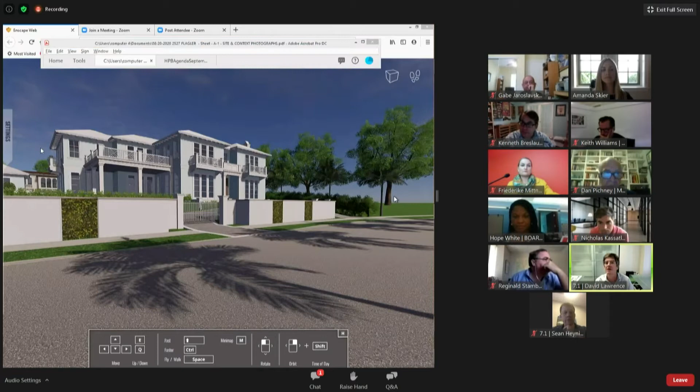Is that coming up, or hold on? Yes, okay. So there's this, let's see, whoop, that's not it. I've never had a problem like this before. So are you seeing, why is... this is the rendering that's up, but previously you had the image from your PowerPoint or PDF that had all the images. Give me just a second. There we go, all right, so that's showing now.

Hopefully. Okay, great. Sorry about the technical difficulty there. David Lawrence, for the record, David Lawrence with David Lawrence Architecture, here to talk to you about our resubmittal for 2527 Flagler. This would be lot 2.

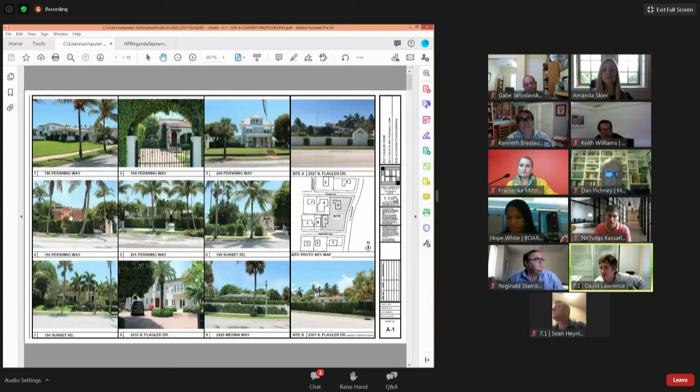So we'll move on. This is the streetscape from before, along the south side of Pershing, and along the north side of Pershing. This was what we discussed last month. You can see my cursor, I hope, right? Hopefully, can you see the cursor? Okay, great, just want to make sure.

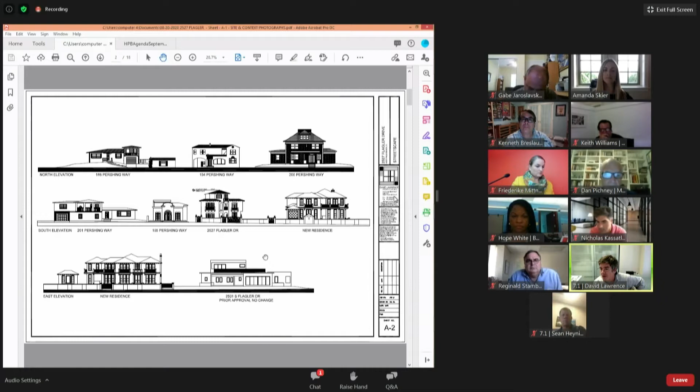And this is the proposed revised plan for the house in front of the general's house, from the Pershing view. This is the streetscape showing it from the Flagler view, and this is the streetscape showing the 2501 approved version of the elevation. So this is the existing property, and this is the easement that we're in the process of abandoning right now.

And this is the site plan showing you all 3 lots. This is the original lot. We are taking a portion of this 2501 lot to create this lot here, lot 2, which we'll be discussing today, and then I'll go on to the site plan.

I think to go over what your comments were from the last submittal, about 2 months ago, there was the concern about us using this common driveway, which I think we addressed in our submittal last month, that each house would have its own driveway. So the 2527 Flagler house has a U-shaped driveway that will operate off of Flagler Drive. That was one of the comments.

The secondary comment was that you wanted the house to more appropriately address Flagler instead of the motor court concept that we had. And you wanted the pool building, cabana building, to not be as prominent. Let's see, what else was there? Yeah, that was it, I think.

So here we have the site plan with the U-shaped driveway with the gates. We had to pull the gates back a little bit for queuing and access. So now the proper front of the house is here, the front door is on Flagler now. And we have moved 1 bedroom upstairs, so we have more of a compact footprint than before, so the coverage has gone down.

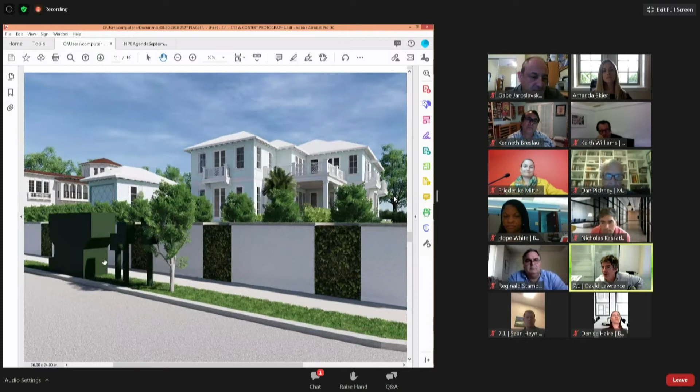So here we go. This is the perspective from Pershing, and you can see our infamous lift station generator there that's caused all our grief. And you can see this is what I meant by where we reworked the mass so that the house has something that more properly addresses Pershing.

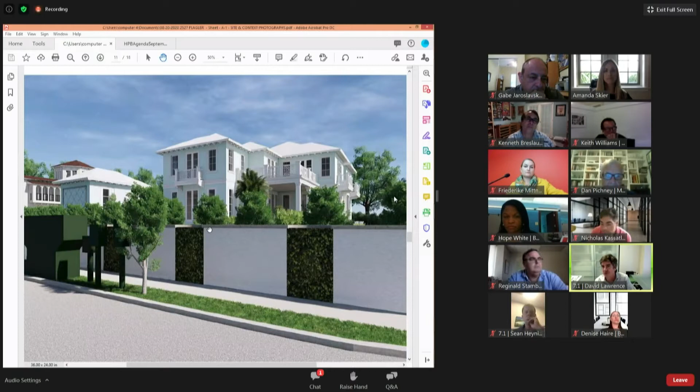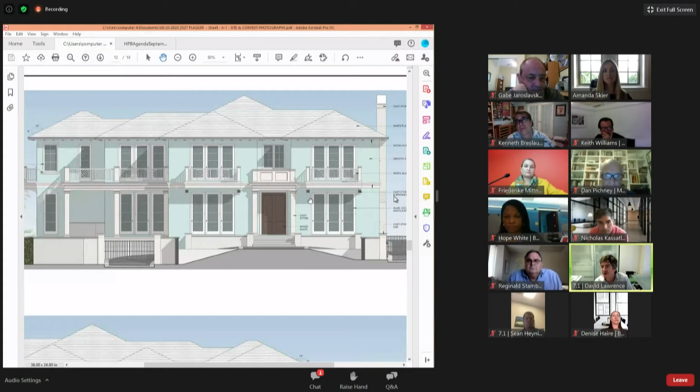And I forgot about one of the other things that you mentioned, about the west side of the house, and we'll discuss those improvements when we get to the elevations. So this is the front elevation of the house, and there was a condition of approval, and I guess I'll address that last if that's okay. So we have the balconies here, very much fronting Pershing, fronting Flagler.

So this is the back of the house. Let's see if I can zoom this back a little bit. So this is the back of the house, you can see what we did. One of the comments was that we had a lot of blank walls back here, so we reworked the plan considerably. And you can see there's a little bit of symmetry in this part of the massing.

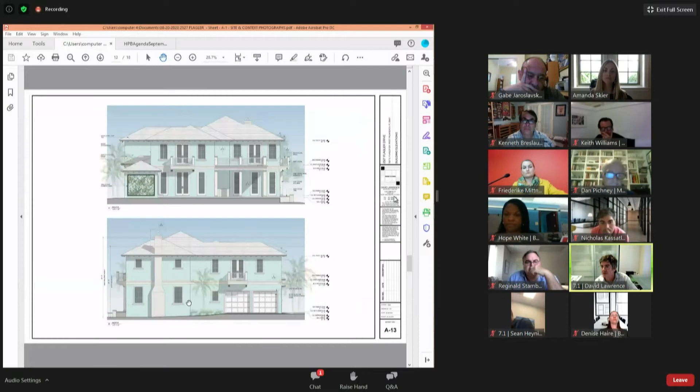And we've added windows so that when you approach this house from the west going toward Flagler, that west side of the house is more pleasing to look at. And I think that was also, if I recall, one of the other criticisms. So this is the elevation from Pershing.

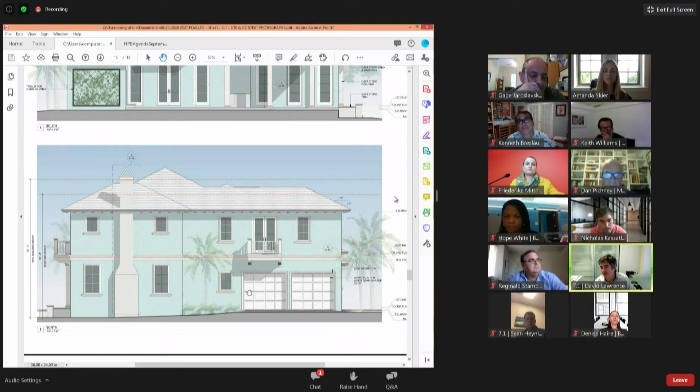This is a little trellis that we put on that one side of the cabana. And then this is the elevation, the hardly seen elevation from the north, which will be occluded by the future house on 2501. So you can see the garages are way back, totally tucked around the mass of the front living room.

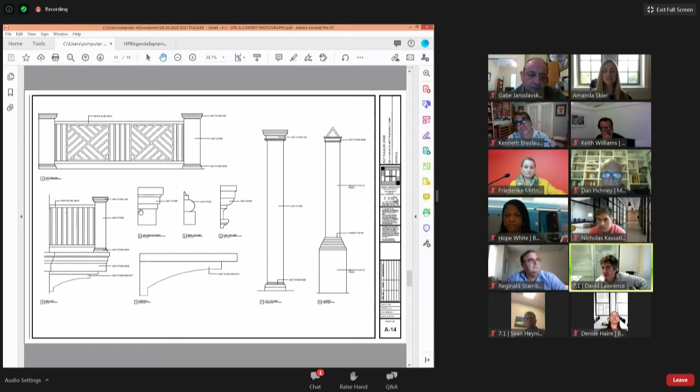Thank you. Do we have any questions of the applicant? I have a question. David, can you just explain, I guess I can maybe see from this rendering how the elevations are working.

It looked like in plan that maybe you had basically a wall around the perimeter of the pool on the south side that returned on the east side, kind of retaining a higher elevation. This will be more or less where this grade is. It's showing a slope down a little bit, but we probably will pull this up somewhat. So it won't come down so hard as the rendering shows, it'll be up a little bit more, so that'll be a little more level. But I got it, we'll have to reconcile the grade situation here because it's up quite a bit.

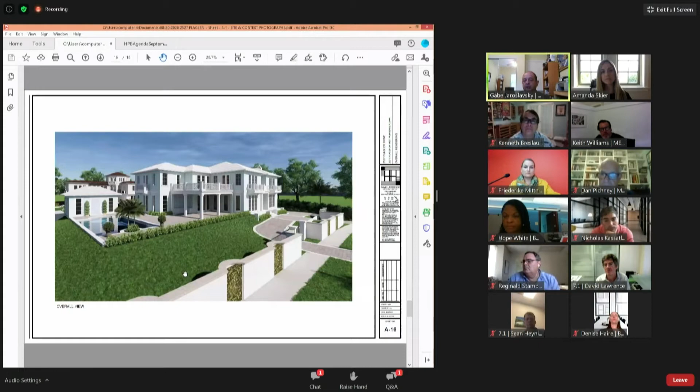Any further questions of the applicant? Yes, I have a question. So here in sheet A5, the zoning summary, you are saying, unless I'm reading it wrong, that the front setback is 26'8", and the required is 30 feet. Is that correct?

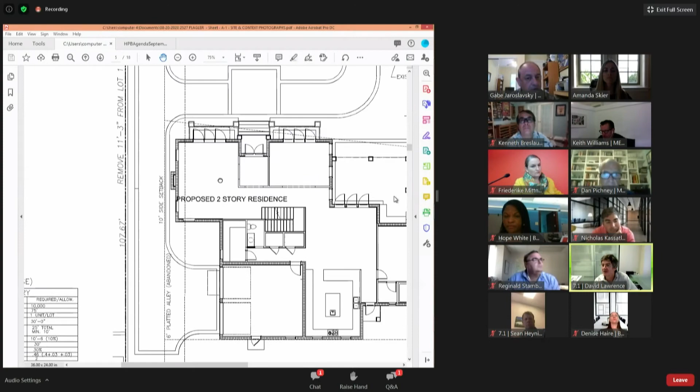It's we're at the setback, it's the 30 feet, that's the mistake. I'm sorry, but it will be behind the setbacks. It is the 30 feet behind the setback. That's a graphical mistake in the drawing.

Well, so you need to correct that table, right? Yeah, we'll have to fix that. There was actually, there should have been a separate zoning sheet that was included and submitted by the applicant. It's the last page of the packet in this case.

But I'm sorry, that actually does not include setbacks, that's just the percentages, I apologize, it doesn't have the setbacks. Yes, it's sheet A5 that has the zoning summary table. The dimensions on the plans indicate it correctly. I see, it's the chart, yeah. Chart's messed up.

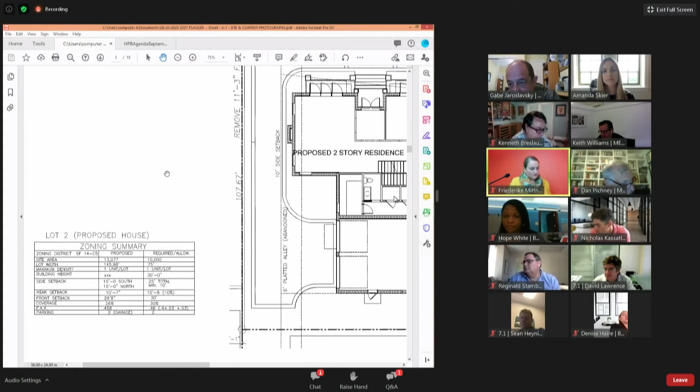Okay. Any further questions of the applicant?

Thank you. Well, I greatly appreciate you taking into consideration all of our comments. We really appreciate it. I think it's a better building for it, so I agree with your comments, and I think it looks better. Thank you for working with us. You're most welcome.

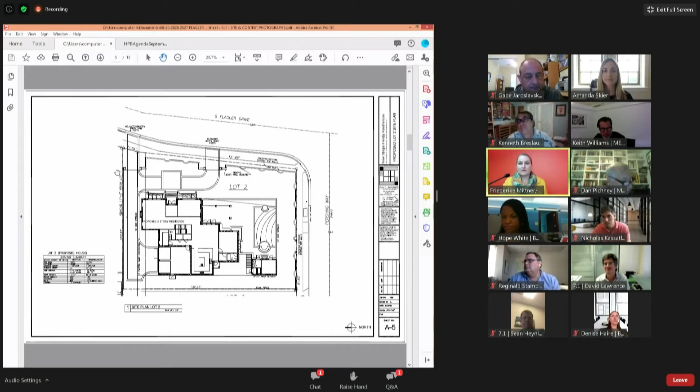Ms. Mittner? Thank you. I will go ahead and pull up my PowerPoint, which has a lot of the same or similar images as the applicant. Friederike Mittner, presenting case 20-38.

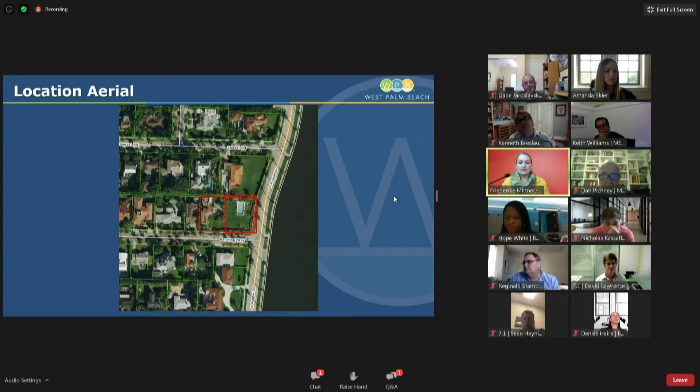This is for the new construction of a single-family home on the eastern portion of the lot, seen here at the corner of South Flagler Drive and Pershing Way. As we've discussed previously, the lot is going to be submitted for a replatting for a lot subdivision, as well as an alley abandonment on this portion. The board last month already approved the rehabilitation of the existing contributing structure. So this evening's focus is just on the eastern portion of the lot that, pending approval of that lot split, would be then eligible for new construction.

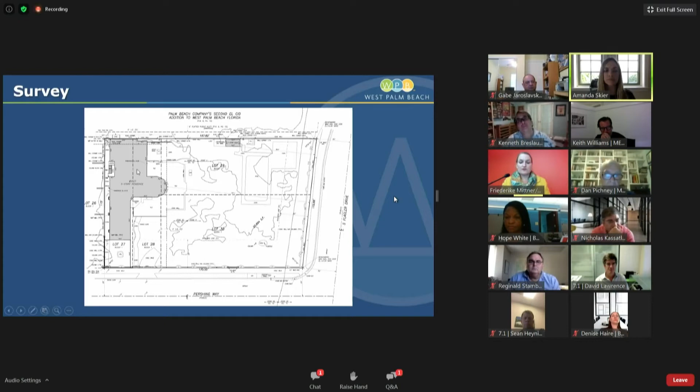This is the current survey of how the property is configured with the contributing residence to the west. These are just some images looking at the subject property. This is looking north along Flagler Drive. Again, this is the portion of the lot that is proposed for the new construction, a little closer in, and as has been discussed previously, the lift station. We did get some feedback that the city is continuing to work on the relocation of it, but there is no commitment for a time frame on that.

The wall element, which has been presented in the plans to be retained, some modifications for openings along Flagler Drive to accommodate the new drive. And so again, the request is for the construction of a new 2-story single-family residence and a detached 1-story cabana of approximately 6,100 square feet on the newly created lot fronting Flagler Drive.

Proposed, as you can see, smooth stucco finish, a flat white tile with multiple hip roofs. I think that's one of the bigger changes from the previous proposal is the roof lines. It's a Bermuda-inspired home. Windows are a mix of multi-pane with horizontal muntins, both fixed and casement style windows with white frames. And it is now an east entrance, and they are proposing a wood simulated double door and Chippendale railings throughout the different balconies.

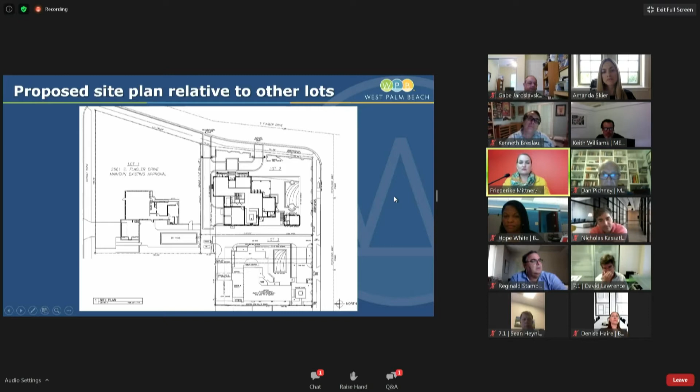So again, as you've already seen the existing site plan, there's currently a swimming pool in the area. And then this is how the 3 lots would work. Again, what you heard and approved last month was lot 1. Tonight's presentation focuses solely on lot 2. As you've already seen the site plan for just lot 2, the first floor plan, the second floor plan, and the only 1-story element here is that cabana, and the roof plan.

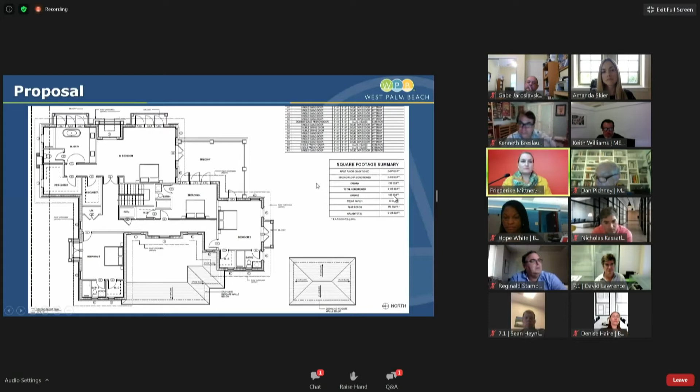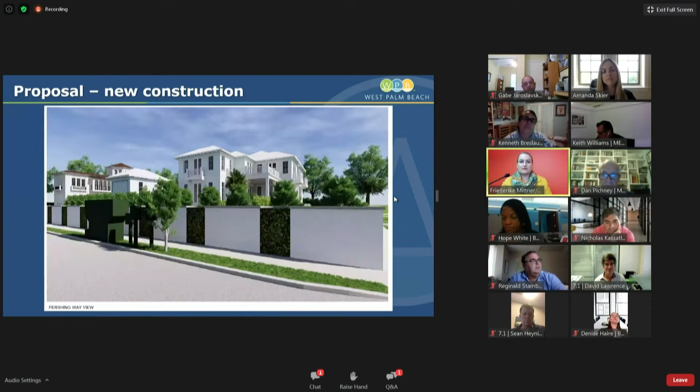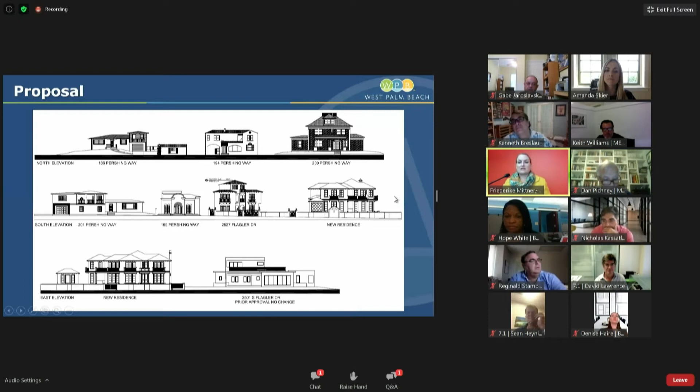The elevations that were presented to you. This is the front door. Staff has a recommended condition that it does become a single door. The other elevations and some of the different renderings showing the different perspectives that were just shown to you as well. This is walking around. And then again, the streetscape relative, the line drawings relative to the other homes. And so you can see it's kind of been compacted more and condensed in its massing.

The review criteria that staff used to analyze the request are the criteria in our historic preservation ordinance, the additional compatibility standards, as well as Secretary of Interior Standards number 9 and 10. Those are the 2 that relate to new construction. We do believe the proposal meets those, and we are recommending approval with conditions that, of course, the alley abandonment and the subdivision process shall be approved and finalized prior to any permitting or work commencing on the new construction of this house. The perimeter wall shall remain and be restored as indicated on the submitted plans.

That does include removal of 2 portions where the driveway would be added, and then the pyramidal portion being added at another location. We are recommending the front door shall be a single door with or without side lights, and that we do need additional information on the windows in terms of the product approval prior to permitting, to make sure that they are compliant with the adopted fenestration policy, including the materials and glazing, muntin profiles, and just getting those details right. Otherwise, again, we are recommending approval with those 4 conditions.

Thank you. Thank you. Questions of staff?

We're okay with all the conditions with the exception of one that we would respectfully disagree on: we would prefer that the front door be double doors as designed. That would be the only thing. Partly it has to do with the way the windows work up above and some of the elements on that balcony, we just felt it looked better with two doors.

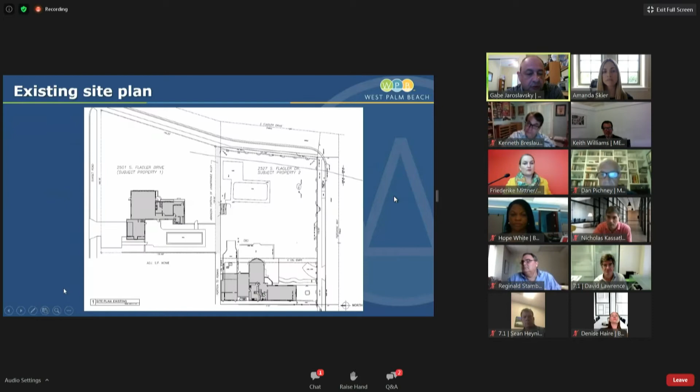And the relocation of the one pyramid, let me show you, so that would be this one. The gates are over here, and then the pyramid shifts, but I'll have the applicant expand on exactly where they're going.

We actually did not have the pyramid relocated. We were removing it in our plans because there didn't seem to be a logical place to put it. So that was in our plans. We really didn't have it relocated, we had it removed, the pyramid piece. And what we were doing for the gate pieces was...

The heights of these pieces exceed what's allowed by code, I think. So the idea was to duplicate the shape of them and put them at a height that's more commensurate with code, because we're pulling them back. So that was the idea for that.

Is that pyramid something you could relocate? You would have to replicate it now. It kind of blocked a lot of sight lines, so we were not real keen on keeping it, to be honest. It didn't.

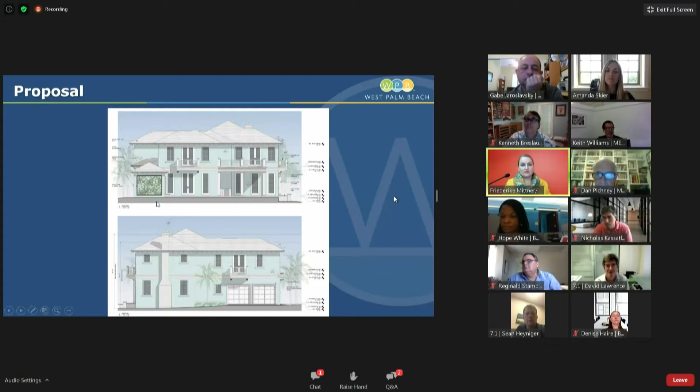I would make a recommendation that if it's relocated right in front of the cabana here, there's no sight line obstructed. That's exactly what I was going to say. We have zero problem putting it on Pershing wherever you would like it, we'll work that out with you. How about right where the generator is? Yeah, right where that, you betcha. So somewhere on Pershing. Yeah, we have zero problem with that.

Also, David, that pyramid really is interior facing. It was a plant holder originally, so we'll dress it back up, make it nice. So you would be okay with us adding that as a condition, that you'll work with staff for the relocation? Yeah, that we'll relocate to Pershing, absolutely.

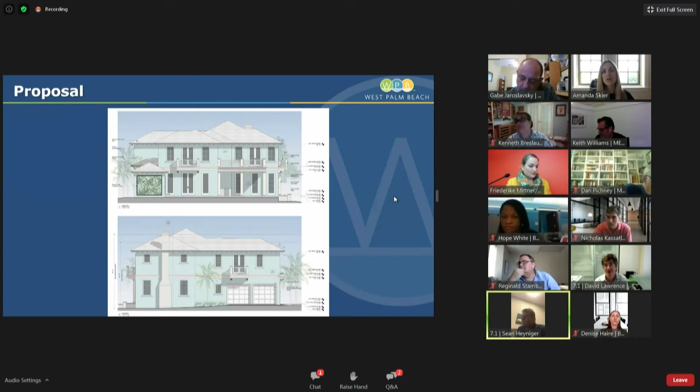And Ms. Mittner, do you have any concerns that the size of the original piers are changing with the two lions? I did notice that in the rendering. Well, it's just a code issue, isn't it? But they're historic existing, properties are exempt. Right, you're right. I think these are really key elements.

Okay, we have no issue — I was trying to anticipate that we were breaking the rules and trying to make it right. But if you're telling us that we can use them as is, then we will either reuse them or duplicate them. Well, they're existing, so yes, we'll work with you. And would you mirror the same height at your new entrance for the other portion of the drive? I guess we would have to probably, that was another part of the reason — they could become obstructions.

I think my concern is that this property is being subdivided, a new home is being built on it, but by preserving the walls, there's evidence of the fact that it used to be one property. So I think that would be my concern in altering them significantly.

Well, I guess what we'll do is if we duplicate the other ones, we'll see how that works out. And if it's an issue where it doesn't work out, we'll come back. So we'll agree to it, and if there's a big problem, we'll try to work it out with staff. And if not, we'll come back. So we'll accept that we'll duplicate those other ones on the other side to make a match the best we can.

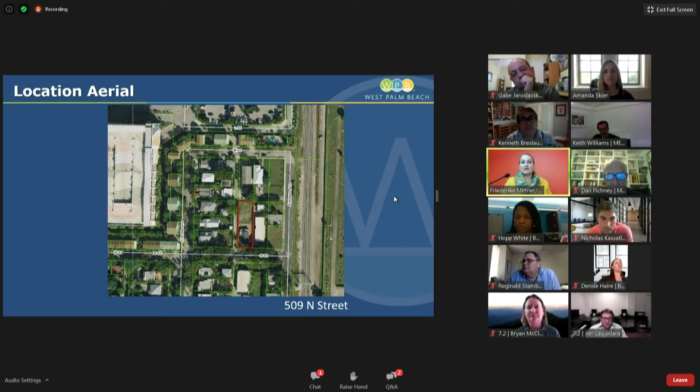Thank you. I'm going to go ahead and share the screen for the proposal. So the request is for new construction as well as a Class B special use, because the applicant is requesting a 1,000 square foot structure on a 50-foot wide lot with a kitchen in the accessory. We reviewed this last time, that it is located in the north end of the Grandview Heights Historic District, where you find traditionally more dense development in terms of multiple units. It's also surrounded by townhomes and borders the downtown master plan area, where you have the high-rise apartment and residential buildings.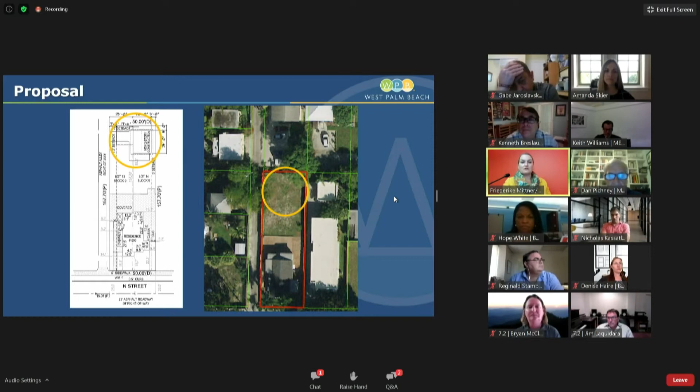So the request for the waiver for the size as well as the lot width is something that we've reviewed and we believe is appropriate for this construction. You can even see in the background the residential tower downtown. It would be accessed off the alleyway, and again, it is at the rear of the lot in a neighborhood that has many detached accessory structures, two-story in nature. So this was the previous proposal, two-story, and it did have a large cantilever deck. Staff's concern last month was the proportion of that deck and also that there were no support beams indicated.

Unlike the appropriately scaled balcony here with these brackets, the direction given to the applicant was to perhaps enjoy city views utilizing a roof deck. So this is what was developed by the applicant and his architect and submitted for your review this evening. These are the proposed and revised elevations. I apologize, somehow the floor plans didn't make it in, but they are very similar, and perhaps the applicant has those to share, and they should be in your packet. Staff has reviewed the application, and we believe actually the original proposal is more in keeping and compatible with the historic district.

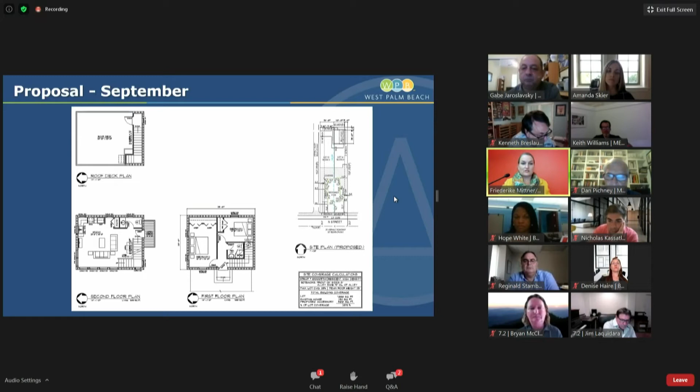Yeah, I mean, it's completely different. I don't think that this design really meets the quality or the criteria for a historic area, right? And to be comparable with a historic house on the same lot, right? It's a completely different thing.

Yes, we felt it was a much more urban application. And again, the roof line is something that doesn't have any inspiration from the bungalow from the front.

Ms. Mittner, how wide are you recommending the extension now be made, scaled back? Perhaps twice as deep as these balconies. So I'll have to pull the floor plan real quick on that to see where we were in width. So that was 4 feet. So I'd say 8 feet maximum.

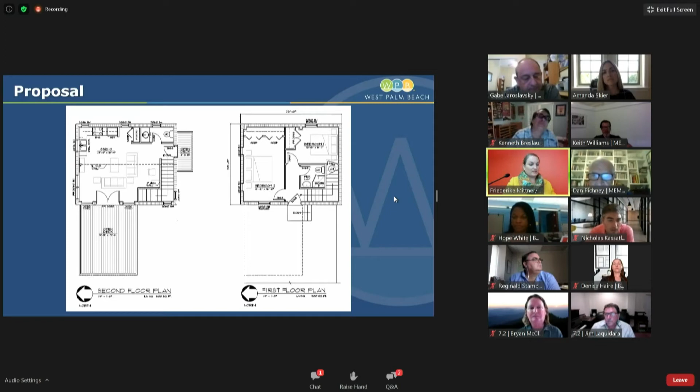But without supports, because once you add supports, then you have to count that square footage. Yes, so they would, correct. So it would not be supports that go down to the ground. It would be, they could perhaps have brackets like this that return back to the building, but it would land about here, about half of what's shown here. This is, I believe, a 14-foot deep deck.

Ms. Mittner, is there anything you think the applicant could do change-wise to bring the roof deck into compliance? I feel like we gave him that guidance last time, and I think it was a good suggestion to explore. However, I think the execution just changed the architectural elements so much that it went further away.

Is it mainly the way that they designed the access? I mean, is that changeable? I mean, can I speak? I was just- Right now we're in, okay, but we'll give you an opportunity in a minute.

Ms. Mittner, I wanted to ask, could they do an external staircase? I know we don't always recommend something like a spiral staircase, but is that an option as access to the roof rather than an internal staircase? That could possibly work.

They'd have to take the square footage into consideration because one run of stairs is counted as square footage. So if they achieved it that way, that's possible. I mean, you see that on a lot of the accessory structures in El Cid with the Mission or Mediterranean Revival, that you have an exterior access. So I think that would be a possibility.

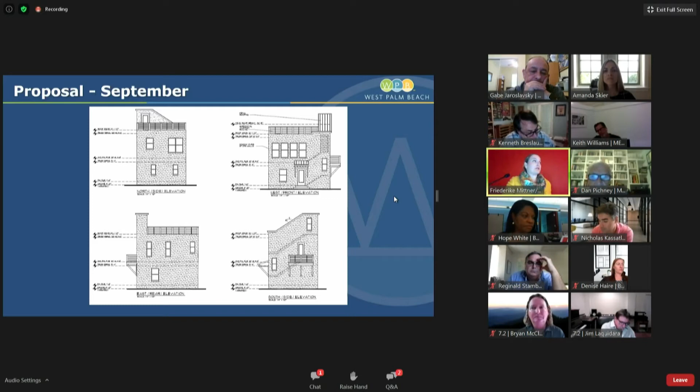Okay, one question, that's exactly what I was going to ask. Could you create a parapet that acted as your railing, but it still basically looks like the roof, but acts as a parapet and is open on top? I would defer that to the applicant if that's something they're open to. I mean, I think it's certainly feasible.

And also the slope, you know, the parapet on the south elevation really needs to be flat also. I mean, correct. There is no way to make it slope.

I'm not sure that a railing could actually aesthetically look like a parapet. I mean, you could have a parapet serve the function of a railing in height, but aesthetically... Yeah, well, that's kind of what I meant, and probably it gets too complicated. And the reason for the pop-up element of it, to me, it just doesn't seem to work.

I wish I could articulate it better. I believe the intention of doing the railing on the roof was to have the visuals, right? The sightlines to the views of the city. So if you do a solid parapet, when you're seated there, you don't see really anything.

Understood, correct. It would act as a solid railing, you're right. I mean, just throwing another option out there, what if the railing was terracotta or something like that in between, so it was more mission style?

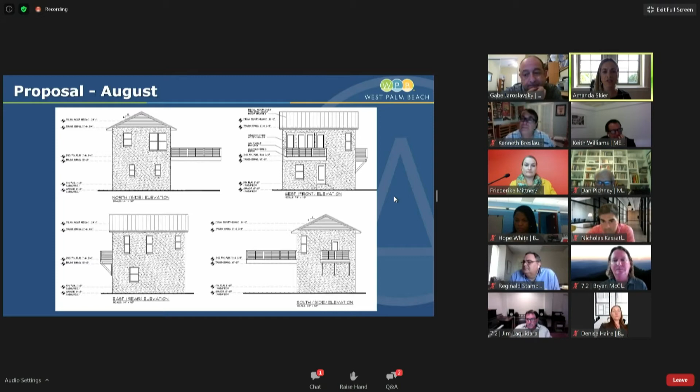So, just to clarify, Mr. Jaroslavsky, you're suggesting the spiral stair if you were to keep the roof deck design, which is option 2. Correct, but he's expressing that he's kind of over the original design of having an enlarged deck, right? Because I am hearing that we could allow him to have a larger deck as long as he can cantilever it off the house structure, right? The wall.

Obviously that is a much better design from an aesthetic standpoint, right? Because we can keep the hip roof, right? That works with the architecture of the main house.

We can work with him on this if the board's leaning towards this proposal with the spiral stair and not having that projection on the 3rd floor or on the roof deck. So it remains just a very clean, flat.

Yeah, that pop-out is very disturbing to me. Also, the fact that it has a slope roof is also very disturbing. So I don't know if another solution can be found to make it more pleasant. Did we lose Bryan? I don't see Bryan. Maybe it's a flat roof, I don't know.

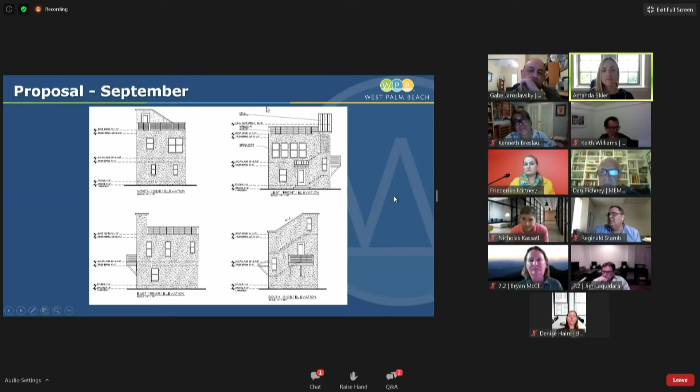I think those are good points. So you wanted to go into executive session to discuss further? Yeah, I think that's what you were suggesting. Do we have any members of the public that want to speak on this case? Not that I'm aware of, Madam Chair. I do not see anybody, no.

Thoughts? I think everybody has kind of expressed how they feel about it. I do think it was a good suggestion to explore the option of a roof deck, but I can understand that there is some conflict in executing it design-wise to ensure that the accessory structure is still compatible with the primary structure.

So I understand what you're saying, Mr. Jaroslavsky, that really the first design is more compatible with the existing structure. Yeah, I mean, my opinion is that it doesn't have to be completely comparable per se. I think that will be a better addition to the neighborhood. But...

I am not opposed to doing a roof deck, but evidently that pop-up that was created there is not satisfactory, let's call it. So I don't know if there is a way to push that stair like an L-shaped stair, like a regular exterior stair that we see all over the place, with a nice solid wall with railing that just lands on the roof deck without cover. That would eliminate the pop-up. When you get to the roof deck, you have a railing, the same parapet of the stair will continue, creating the parapet of the roof, and will not create a pop-up. That is what is bothersome.

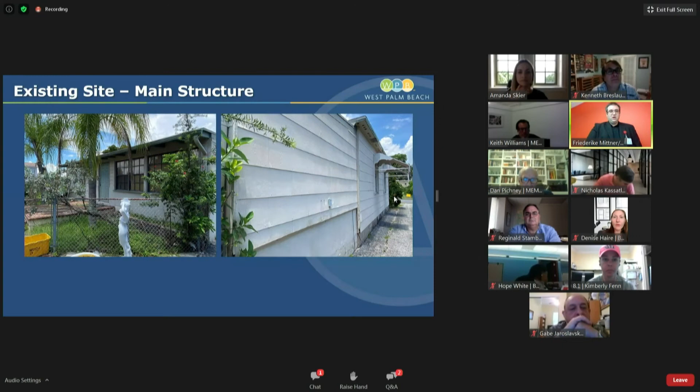Here we have a couple photos of the main structure. From the exterior, the structure does seem to be in decent condition — it does need some work. And here we have the accessory structure, which is listed as non-contributing.

Just to let the board know, in the original ordinance for Northwood Harbor in 2006, the primary was contributing, as well as the accessory structure was non-contributing. And then for the resurvey, when it went to commission in 2019, the statuses of the buildings did remain the same.

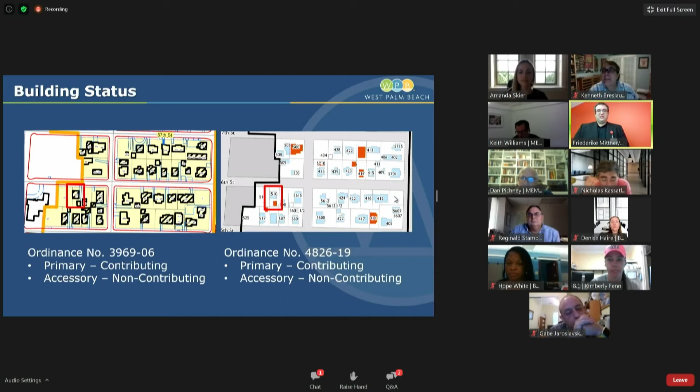This is from the green card, which was an assessment done in the 60s, and the structure was built in 1947. The garage was built in 1951, as well as there's an addition to the main house in 1952.

So staff has reviewed the criteria for demolition for the primary structure. This is a contributing structure, and demolition of a contributing primary structure will represent irreparable loss to the Northwood Harbor Historic District, as well as the city of West Palm Beach. There also were no plans submitted for new construction or any information submitted that would illustrate the ability, or lack thereof, to actually rehab the structure.

Regarding the demolition of the accessory structure, which is non-contributing, its loss would not represent an irreparable loss to the Northwood Harbor Historic District or the city of West Palm Beach. Staff has two recommendations: first, to deny demolition of the contributing primary structure, and second, to approve demolition of the non-contributing accessory structure.

There was public comment received from the Northwood Harbor Neighborhood Association. It reads: it has been brought to our board members' attention that the owners of 510 56th Street are requesting to demolish a contributing historic house built in 1947 in the Northwood Harbor Historic District. In October 2018, the Association submitted an application for redesignation of the district, which passed on May 6, 2019 as ordinance number 4826-19. We're requesting that the board deny case number 2055, allowing a contributing historic home to be demolished in the district. This would set a negative precedent for the future of the district and the homes within this community. Thank you for considering our request. Northwood Harbor board members. Thank you.

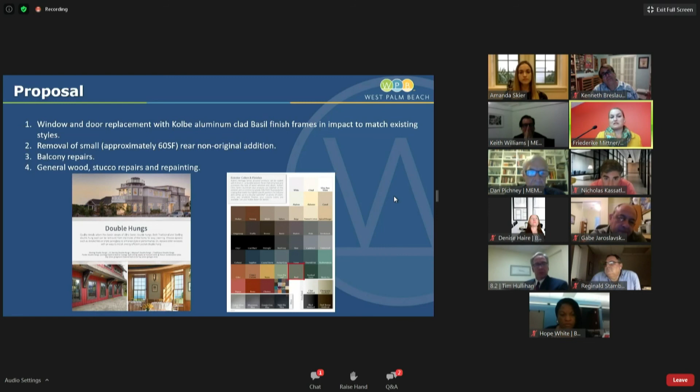They're also asking for the removal of a small, about 60 square foot rear non-original addition. We see that it's not a safe situation, nor is it original, and so staff has no concerns about that. Staff is also fully in favor of the balcony repairs. It's just the concern of replacement, other general wood and stucco repair and repainting. So again, excellent product for the components that are being proposed for replacement.

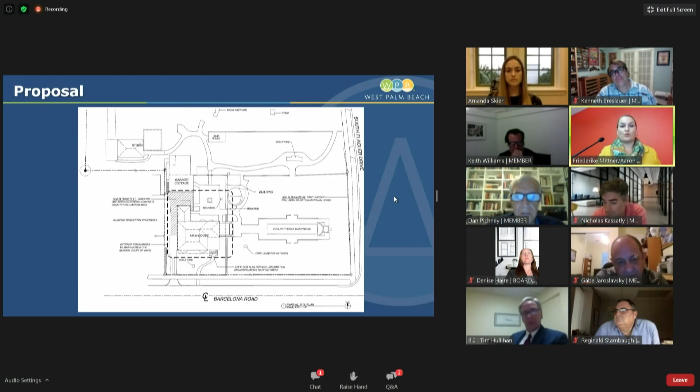Again, this evening's application is mainly focusing on the main house. The studio is not up for discussion, because that has actually also, the studio also has wood windows, beautiful wood awning windows, but this proposal is just for the main house.

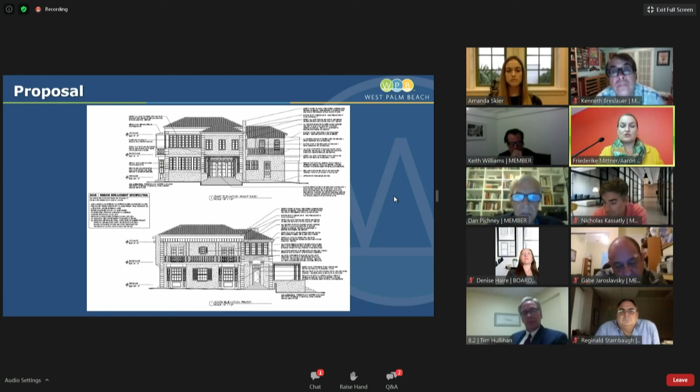And then these were very detailed drawings that Mr. Houlihan had submitted, clearly indicating the proposed changes and what the new windows would look like, as well as the floor plan clearly indicating that rear addition that's being removed, and again, the alterations on the structure.

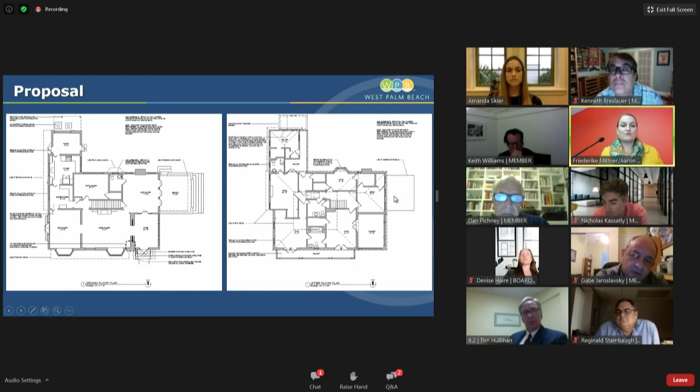He also supplied these images, some close-ups of the windows, and that small addition in the back that's being proposed to be removed. This is the justification statement he referenced, a product I believe was developed in response to the state's concerns about the replacement product and the visual impact. So this is a comparison of the existing versus the proposed product, and also the recently submitted component of the resiliency product.

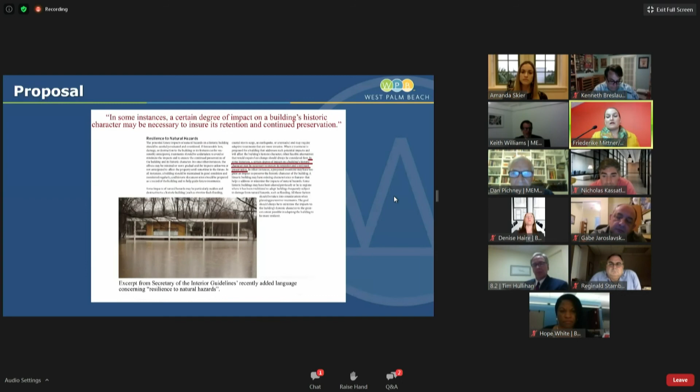Again, we are fully in favor of improving the resiliency components of the site. Just today when I was out, I saw the flooding on Flagler, half a block away, not even half a lot away. So it is a very susceptible site, but staff does believe there are other ways to address the front windows. So we do not believe that the application fully meets the Secretary Interior Standard number 6 in terms of repair rather than replacement.

Therefore we're recommending approval for the request, except that the south facing windows shall be retained and repaired, minus the floor porch enclosure, and that all windows shall feature clear glass, no low E or tinting of any kind. And again, the balcony components that require replacement, if repaired, shall be submitted to staff for review, and you heard the applicant is amenable to that. So it's really just a discussion of the south facing windows.

I have been in touch with the state. I am in receipt of the email, and I'd like to read that to you. That is from Timothy Knappe, the Historic Preservation Grants Program Supervisor at the Division of Historical Resources. He writes, hello all, cc'ing both myself, Tim Houlihan, and Rick Hilburn, the state architect, and the grant manager, Cody Vanderploeg.

It states, as confirmation of the current status of the project, the window replacement designs and justification statement are currently under architectural review with the Division of Historical Resources. Once the documents are approved by DHR, following any necessary edits being made, the documents will be forwarded to the National Park Service for their final review. As the funding agency for the project, NPS must approve the window replacement designs and justification before any such work can commence.

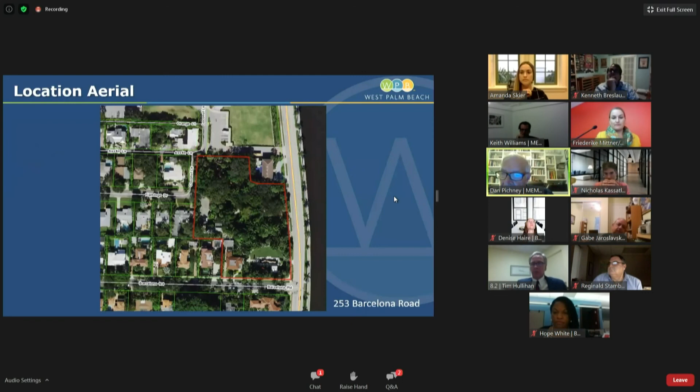Questions of staff? Ms. Mittner, yes. Are you saying that the state and the feds could overrule our requirements, our approval with conditions?

That would only be as far as the grant funding. We still have our own ordinance, and the permits would not be issued as such. Again, our board attorney can weigh in, but they may have a different opinion at the state and at the Park Service. But again, local jurisdiction in terms of our ordinance would not be trumped by them.

Okay, I agree with what Ms. Mittner has stated. We have a West Palm Beach ordinance giving the Historic Preservation Board the authority over these historic districts and historic properties. And the board has this duty and responsibility to evaluate these applications under the standards according to our code. So this grant money may be subject to some other entity evaluating their criteria, but we still must follow our code and go through our process.

I don't have any questions for staff. I agree with the comments made, and I believe that preservation is rooted in local preservation law and the ordinances, and the federal and state level, in my experience, strongly defers to the local level on the CLG. So staff, I don't have any questions for you.